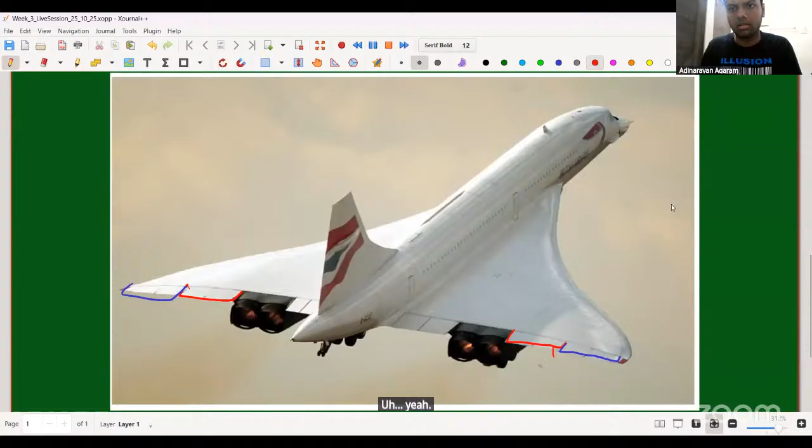Can you mark the control surfaces in the back? So, outboard of the engines. Yeah, just the outboard ones. And you can maybe just highlight, draw in red. Yes, sir. Okay, draw the other ones in blue or some other color, because actually this helps. Sure. Thank you, and sorry I'm paining you on this. No. Yeah, this is fine. Okay, so now you have a red-blue pair on either side. Those are your control surfaces.

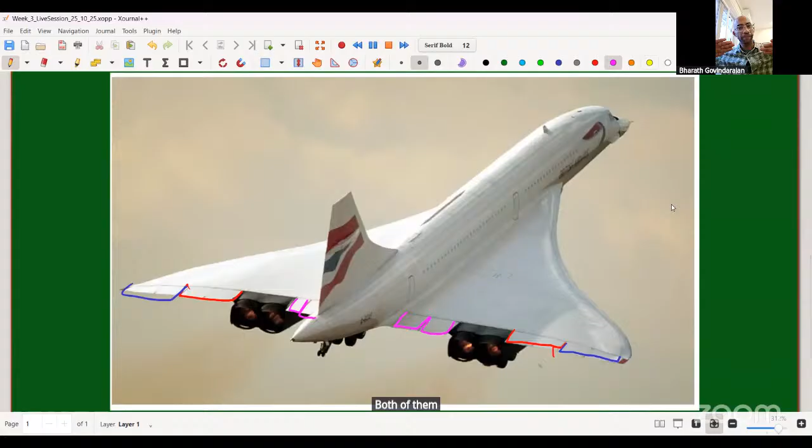Now there are a few things we can do here. Let's say we tilt both of them down. Then effectively you're going to create a force up. And again, it's the same idea as before, where you have a long distance to the aircraft center and the vehicle will effectively pitch down, right? So if you tilt both red-blue pairs on the left and right down, then you can effectively make it pitch. So this acts like an elevator. If you move the control surfaces in the same direction, you can effectively get a pitch of the aircraft. So that is why we call it an elevator.

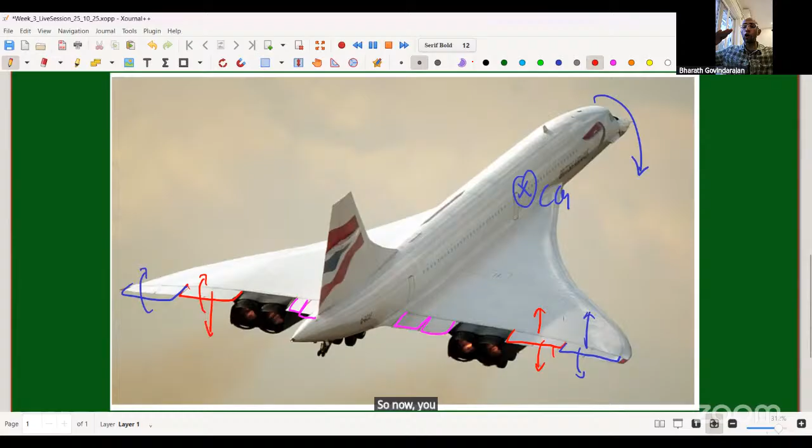But you can do something a little bit more fun. You can have one red-blue pair moving up and the other moving down. So the ones on the left side of the airplane could be moving up and the ones on the right side moving down. So now you have an opposite deflection, which means forces acting in opposite directions, as he's shown over there, which will cause the airplane to roll. So the same control surfaces, if deflected together, will cause pitch. If deflected differentially, will cause a roll. So that's why we don't call it an elevator or an aileron. We smash the two words together and call it an elevon.

Okay, so that is a long answer, Chandrasekhar, to your question. I don't know if any of that made sense, so please let me know how that was. Yes, sir. Understood, sir. Thank you, sir.

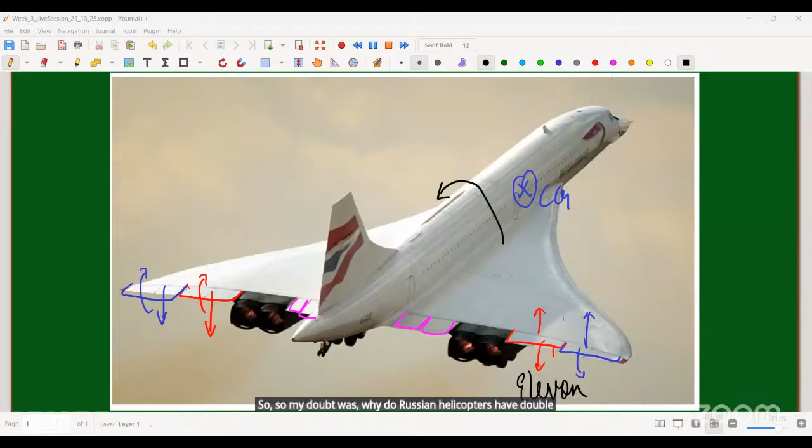So my doubt was, why do Russian helicopters have double spinner wings on their top, while the rest of the helicopters have only one wing, the main wing? Yeah. So, okay. So first, it's called a rotor. We don't use the word wing when it comes to a helicopter. So what you're referring to is one rotor above the other. That's called a coaxial rotor setup.

And I believe that company you're referring to is the Kamov. Kamov is the only company, at least successful commercial organization, that makes these counter-rotating coaxial rotors. In most cases, you have what we call a main rotor and another one in the back called the tail rotor. Coaxial rotors have some advantages, and one of the primary advantages why people stack one rotor on top of the other is to reduce the footprint.

Because a conventional helicopter has one rotor on top and the second rotor, which is really far behind. So the length of the helicopter is quite large. Whereas when you stack one below another, you eliminate the need for the other tail rotor. So your helicopter can actually become quite compact. That's one of the big reasons why people use this coaxial configuration.

Okay, sir. Sure. Thank you, sir. Hey, no worries. Nikhil, ready? Am I audible, sir? Yes, you are.

Sir, what is the use of spoilers on an aeroplane, sir? What is the use of spoilers? What is the use of a brake in a car? The exact same thing, right? Okay, there are two answers to this. So what is the use for a brake in a car? You may say that it is to slow down, but someone else might look around and say brake is really what makes you go fast, right? So unless you can stop it, you're not going to go fast. So the brake has another effect of allowing you to go fast.

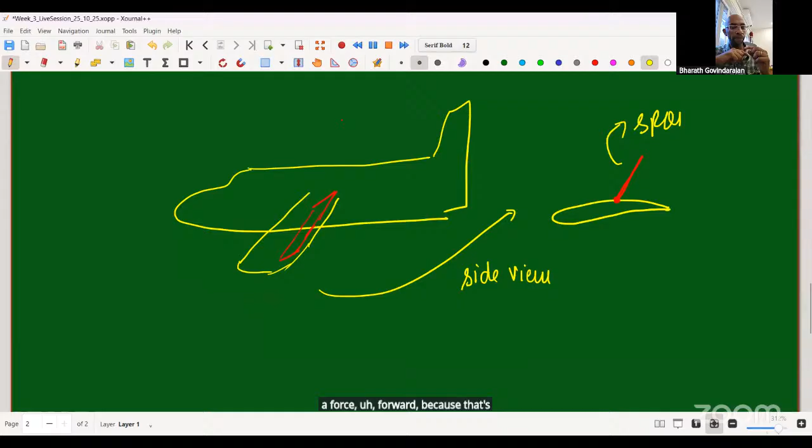The third option, I said there are three options. So there's a disc brake, there's a spoiler. The third one is that engines will have a small slot that opens out of it. So while an engine during its normal operation is supposed to produce a force forward, because that's the thrust component, there is a small portion of the engine which opens and it has the internal mechanisms which allow the thrust to be acting in the opposite direction.

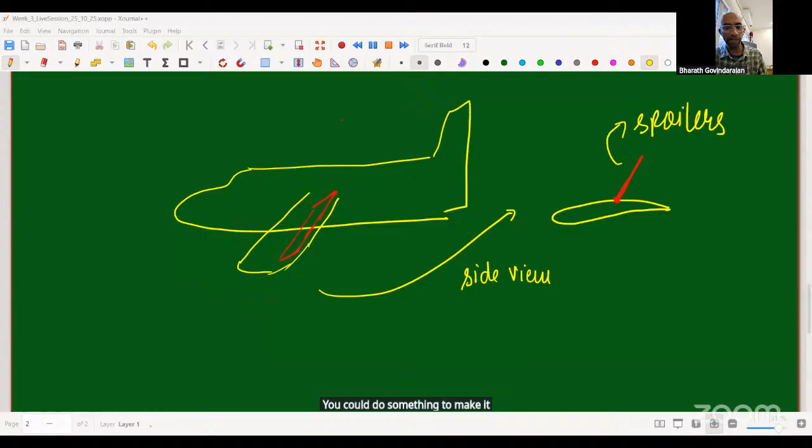So while in normal operation an engine is supposed to produce a force in the forward direction, you could do something to make it create a force in the backward direction, which would again act to slow down the vehicle. So brakes, spoilers, what we call cowl flaps on engines are all to slow down the vehicle. Does that help? Yes, sir.

Okay, thanks, sir. No problem. Hetty? Hetty, are you there? Maybe an audio issue. We'll figure it out. Gia, do you have a question? Am I audible, sir? Yes, you are.

Please go ahead. I had a doubt regarding ailerons. Are they similar to the function of flaps or not? Okay. Functionally, they are different, right? Ailerons, flaps, rudders, elevators, they're all the same idea of having an airfoil with the trailing part movable. In that sense, they're all the same. What really separates them is where you place it on an aircraft and how you use it.

Flaps are typically deployed together and they are towards the inner sections of the wing, and their primary role is to generate more lift so that you can fly the aircraft at a slower speed. So we briefly looked at this. You have an airplane that weighs, let's say, 100 kilograms. It's a really light airplane, doesn't matter. Let's say you're traveling at 20 meters per second, and you have built your vehicle such that at 20 meters per second the wing generates 100 kilograms of force, so the airplane is balanced.

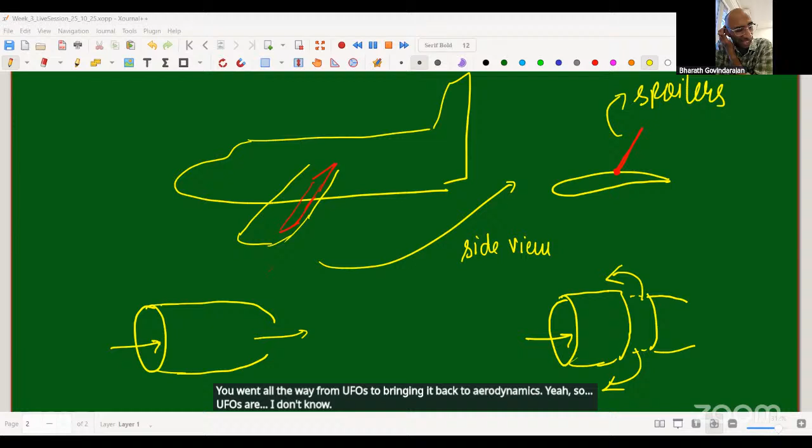Yeah, so UFOs are, I don't know, unidentified flying objects, or if I'm cooking something, identified fried objects. But either way, we don't know exactly what they are, which is why the U stands there. Now, your question is fair, though. I mean, I can't comment on what exactly they are because we don't really know it. But it's a nice question in that, are these shapes that we see, can they be aerodynamic, right?

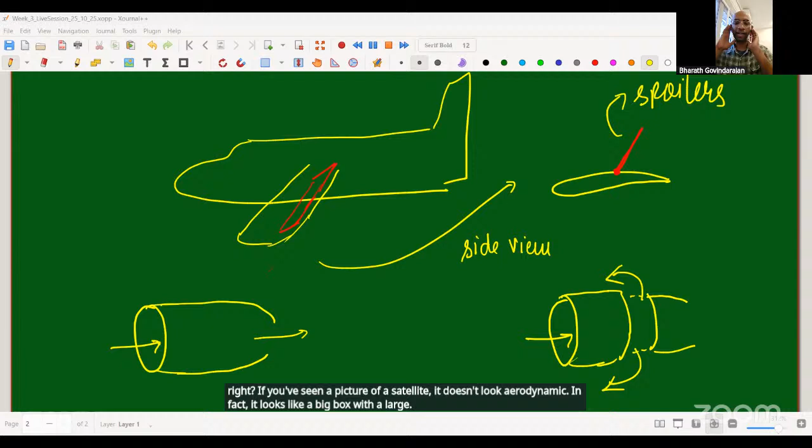And I think that's a good question because we typically think of moving in space based on something has to be aerodynamic and it should cut through the air quite clean. But you can also find instances of objects that are just bulky and appear non-flyable that can actually fly. So let's take a satellite, for example, right? If you've seen a picture of a satellite, it doesn't look aerodynamic. It in fact looks like a big box with a large solar panel attached to it. It's not exactly something that we would conceive to fly.

But you can still control it, because what happens on a satellite is you have small rockets that you place all over that can fire in small bursts that can effectively create a force, and it'll let you do the same three things. You can translate in three axes, you can rotate along the three axes, and therefore you can fly. Argument to that is, yeah, we're in outer space, there's no real air here, so how does it really matter? You can think of the same idea and you can bring it back to Earth.

And there's an aircraft called the F-35, right? F-35 Lightning. It's, I don't know, 5-10 years old, which is still latest generation. One of the things it can do is something called vector thrust. It's an airplane wherein the engines can point down and you can push upwards. So this is an airplane whose conceivable idea for us is it should move quickly in this direction, but it can actually move vertically. It's not at all streamlined in that direction. You just have obnoxiously powered engines pointing down, which can push you up.

So the idea is, yes, you could come up with ideas which will create sufficient forces in different directions. Perhaps what we did not very clearly talk about when we're thinking about airfoils and streamlining is, we want to achieve that in the most efficient way possible. I want to try to do this with the least amount of energy. Right. So even a clunky shape like an airplane to move up and down can be done with very overpowered engines, which is what the F-35 Lightning does. It also has a slight fan in the middle, but it doesn't matter. A classic example of vector thrust would be the Sea Harrier, which is a plane that was designed a couple of decades ago. Now, coming back to your question on UFOs, right?

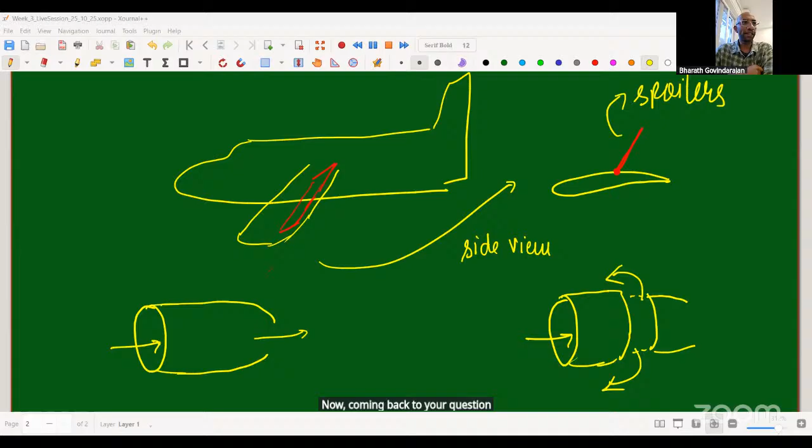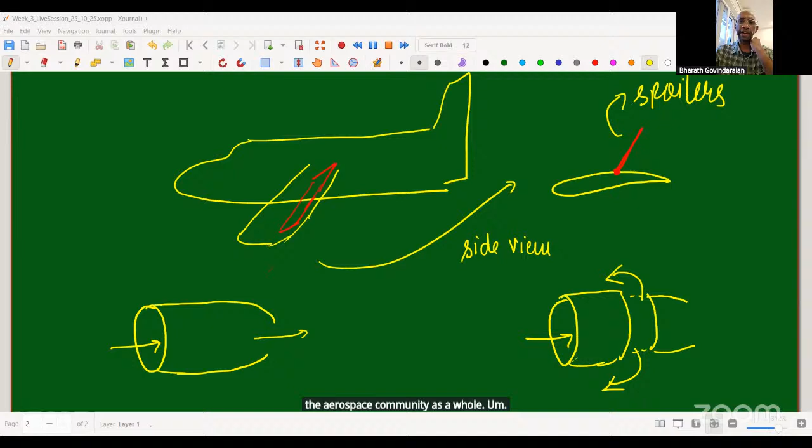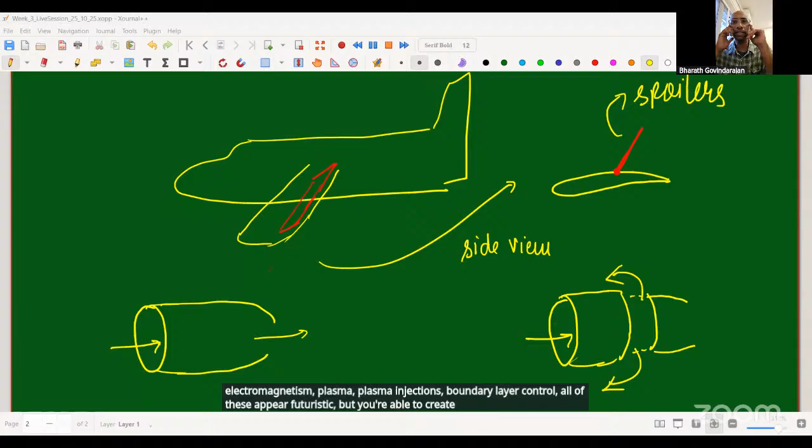There are a lot of technologies that we are researching. We being the aerospace community as a whole, there are a lot of really nice ideas with electromagnetism, plasma injections, boundary layer control. All of these appear futuristic, but at least on a lab scale or a numerical scale, you're able to show that you can get some of these out of the world or out of the way ideas to generate forces in different directions. So whether we are there as humans to be able to do it, perhaps not. It's a little far away, but it is conceivable that these technologies may mature into what we are unable to understand right now.

A word of caution on UFOs also, we only see photographs and we see small snippets of videos. There's a world of difference between something flying level for a long time and something flying in a ballistic trajectory. Right, I can take a big boulder and throw it, and I could take a snapshot of it for a few seconds, and it looks like you have a stone that's flying through the air, right? But that's a very small snippet. Perhaps if you had the full context, you'd be like, yeah, that's really not flying. That's just a rock being hurled into space, right?

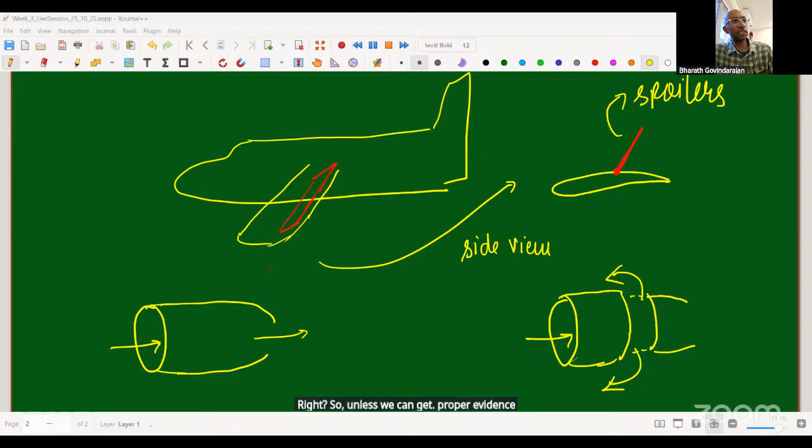So unless we can get proper evidence of these things, verifiable evidence, right? Not someone said it, someone posted it, something that you can actually verify for yourself. It's hard to comment on what exactly these UFOs are. I don't know if I did answer your question.

Hopefully. No, sir, that was really helpful. Thank you. It was a fun question. Yeah. So thank you so much for asking. Thank you, sir. Yeah. Let's see, I'm going in sequence of hands I saw raised. So I think, sorry, who is this? I'm sorry, I can't see.

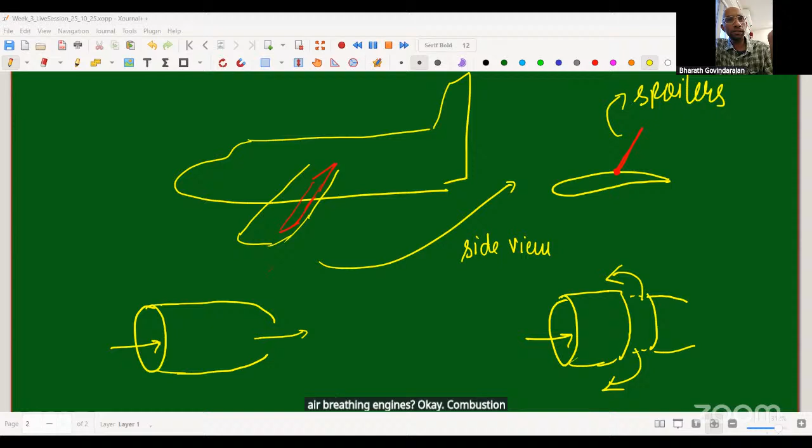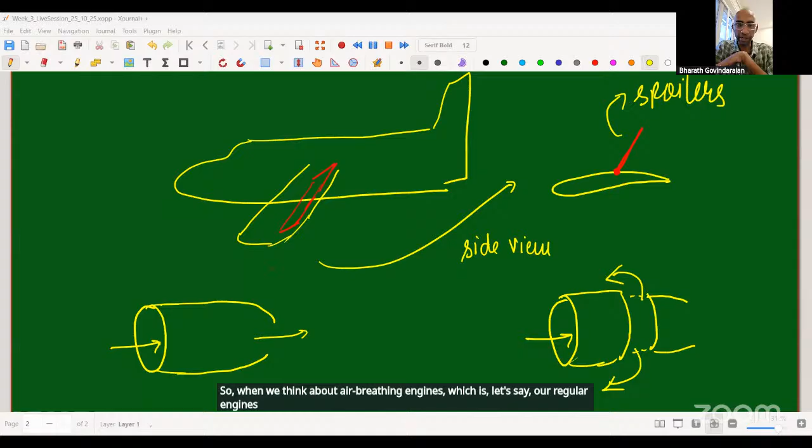What you're referring to is something called air breathing engines versus non-air breathing engines. For combustion to happen, you need three things: oxygen, fuel, and temperature. You need the trifecta of these three things; any two will not suffice. So air breathing engines, our regular engines on regular airplanes, take in the oxygen from the atmosphere, suck it in, and that's why it's called air breathing.

As you rightly pointed out, when you go into space, there is no air, at least not in the conventional way we think about it. So you can't rely on something being sucked in from outside the engine; you have to carry it yourself. You carry the oxygen, you carry the fuel, and you find a way to ignite it. That's what rockets do. You have solid rockets, liquid rockets. We talk about different aspects of these engines next class, so can I request you to hold off on that?

The second part of your question is still valid; I can answer that now. You asked if aerodynamics make any sense. Well, in space, no. You can have fins, wings, aerodynamic objects which are useless because there is no airflow around them to create forces. But these objects still have to take off from Earth and go through our atmosphere where there is air. So those aerodynamic devices are still useful within our atmosphere to get to outer space, after which they become redundant. Is that okay?

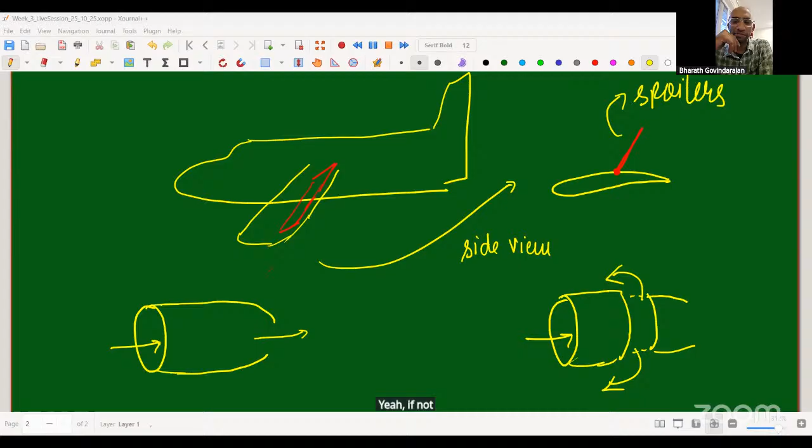Yeah, okay. Thank you, sir. I'll hold on and probably find my answer next week. If not, just fire the same question next week and we'll discuss. Okay, sir. Thank you. Sounds good. Pranay, do you have a question?

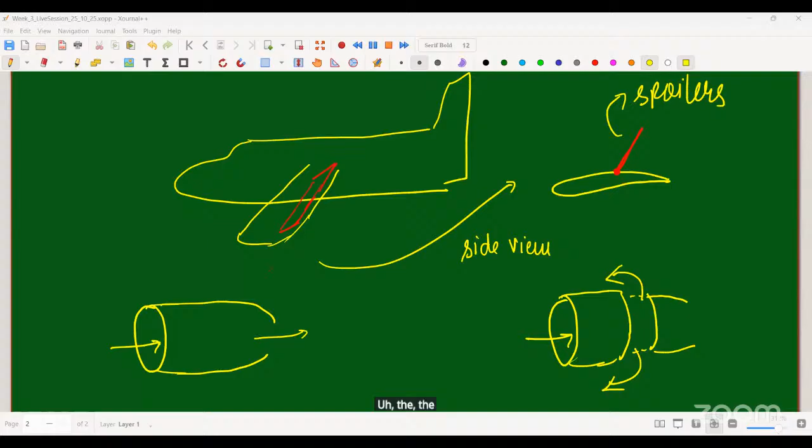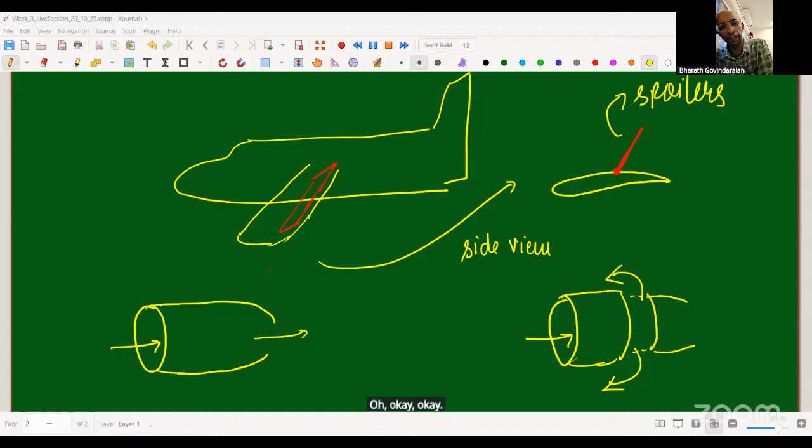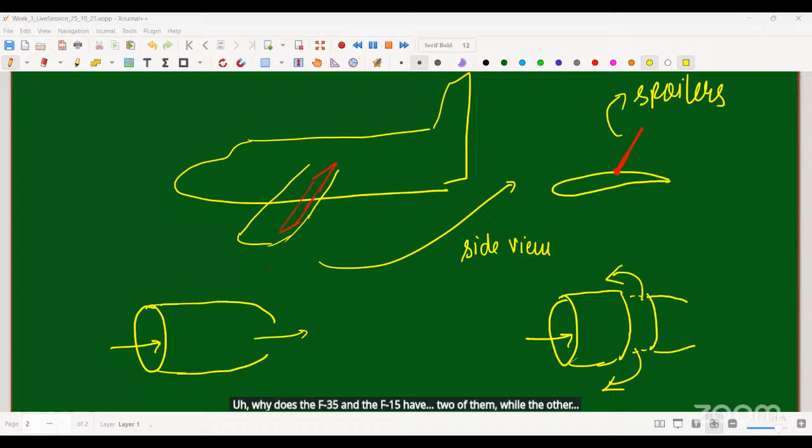Yes, sir. My question was, why do aircraft like the F-15 and the F-35 have two fins at the back, while in conventional airplanes you see only one? I'm trying to remember what fin you're referring to. The dorsal fin, the one at the back. You mean the horizontal tail? No, the upwards one, the vertical one. Okay, got it. So those are the vertical tails. You're asking why the F-35 and F-15 have two of them, while a general aircraft has only one? Correct. This is a great question.

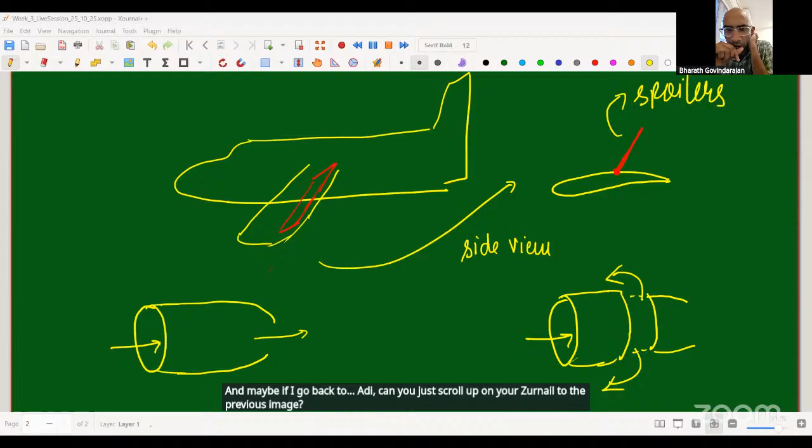This is actually a question on design. Adi, can you scroll up on your Xournal to the previous image? Okay, that works. So here you have a single vertical tail, whereas in some fighter aircraft you have two.

The whole point of the vertical tail is to provide what we call yaw stability and yaw control, such that if an aircraft is going straight and a small disturbance comes sideways, you don't want the aircraft to move in an arbitrary direction. You want it to still be pointing forward.

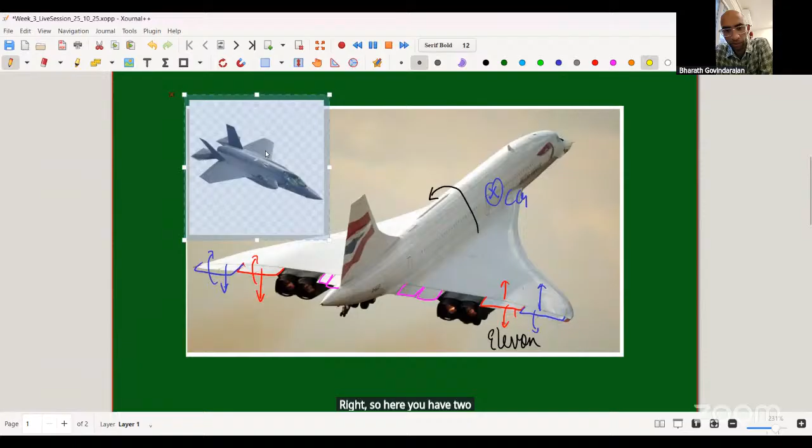Okay, there you go. Right. So here you have two fins and here you have one. So the first function of the vertical tail is to give you yaw stability. Secondly, you want to be able to control the yaw, so there is yaw authority in that sense.

And because these are effectively airfoil surfaces, what is going to dictate the amount of force that you get is effectively going to be the area. So during design calculations, you would have decided I need so much area to be effective. What happens, especially with fighter aircraft, is if you have one single surface, it tends to be really, really tall. And that can affect a lot of the other aspects of the aircraft.

Anything from how it handles, to the structural weight being too high, to a very simple fact: some of these aircraft are supposed to be stored on ships. You have a height constraint. So you may not be able to put a member that is really, really tall. So you say, well, I can't have one tail, I will break it into two tails. That could be one reason.

The other thing you have to appreciate is a fighter aircraft. You always have a trade-off between stability and maneuverability, right? If something is very, very stable, it's not going to be maneuverable, which means it's not going to be responsive to many inputs, which is a characteristic you like for a passenger aircraft.

You want it to be stable, you want people to have a comfortable journey in there. You don't want people sitting in the aircraft and getting thrown around, etc. It's just not a pleasant feeling. Nobody's going to come and buy your aircraft or sit in your aircraft again, and that's just a hopeless business model. On the flip side, when you're a fighter aircraft, you don't really care about it being very stable.

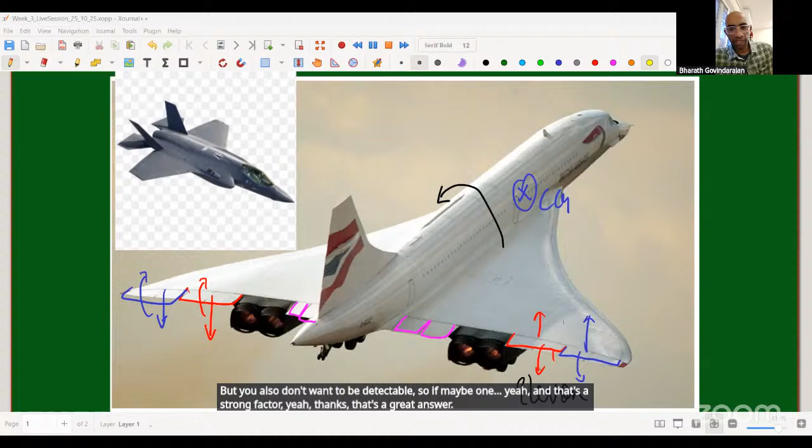Pranay, I hope that was okay. That's perfect, sir. Thank you so much. Okay, we'll tag team. I know a lot of you have raised hands. I'm giving chances to those who have not yet asked a question, so please don't be too upset with me if I don't pull you up immediately. Dhruv.

What? Sorry. Hello, Dhruv, can you hear me? Hmm. Yeah, I'm not fully able to understand what disc we're talking about. I guess when your audio is back, can you just clarify that? Yeah, hello. So go ahead. What were you saying?

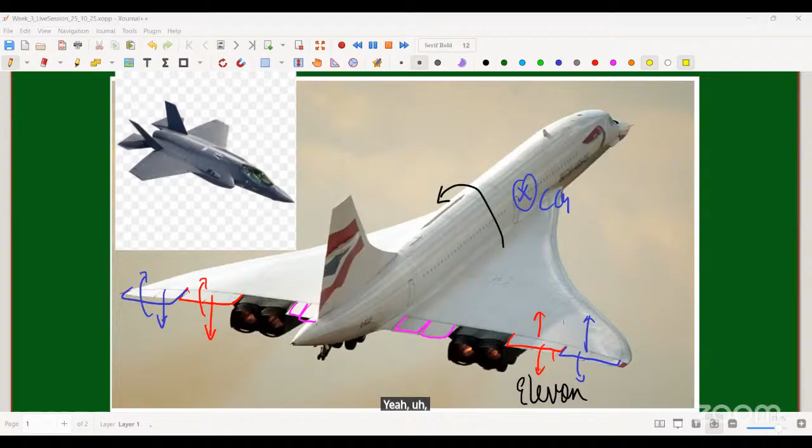Could you repeat that? I'm just saying I couldn't picture an aircraft like this. So do you have an example or something that maybe we can just search on the internet and throw a picture up? Let me just check. Just give me a second. Sure.

Also, another question. Apart from that, I've seen certain Mach 5 aircraft. Instead of having a sharp-tipped wing, they have a blunt wing. What is the reason for that? You've seen a hypersonic vehicle with a blunt tip? Like more towards Mach 5. It's a bit unusual for me to see that, and I don't know why.

Yeah. So, okay. Did we discuss Mach number or is it? Yes, sir, I think so. Maybe it's next week. But it's fine, like I said, I'm not bumping you off. I'll give you a short answer, then we can take the longer answer.

Mach number is effectively a ratio of your speed to the local speed of sound. So if you're flying at Mach 1, you're flying as fast as the speed of sound. If you're flying greater than Mach 1, we call it supersonic flight. There is a subcategory of supersonic flight where, loosely, it is 5 and above, which we call hypersonic flight.

And actually, there aren't too many airplanes out there at hypersonic speeds. In fact, DRDO did a test a couple of months ago, which showed a 1,000-second flight of a hypersonic test bed. So I'm not entirely sure what wings you're talking about. Maybe this you can clarify next week when we discuss.

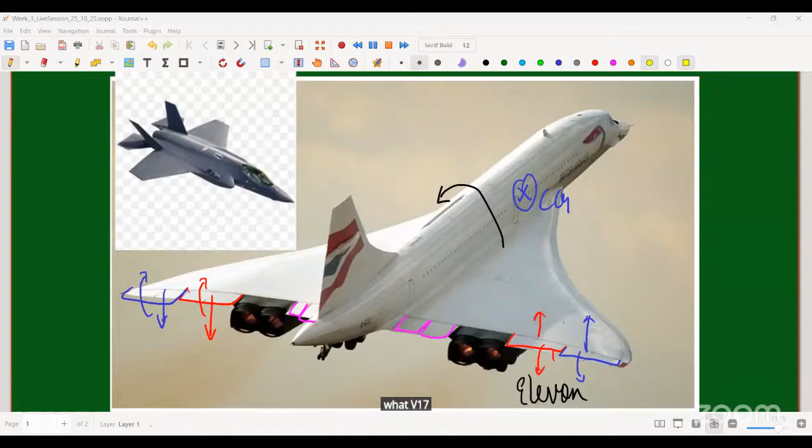Okay, sir. Also, one of the examples of the disc-shaped aircraft is, I think, the Vought V-173. Can you spell the first one? It's sort of like a flying pancake, you could say. Vought V-173, V-O-U-G-H-T. Dhruv, Adi, could you just see if that's something there and throw a picture of that on your page?

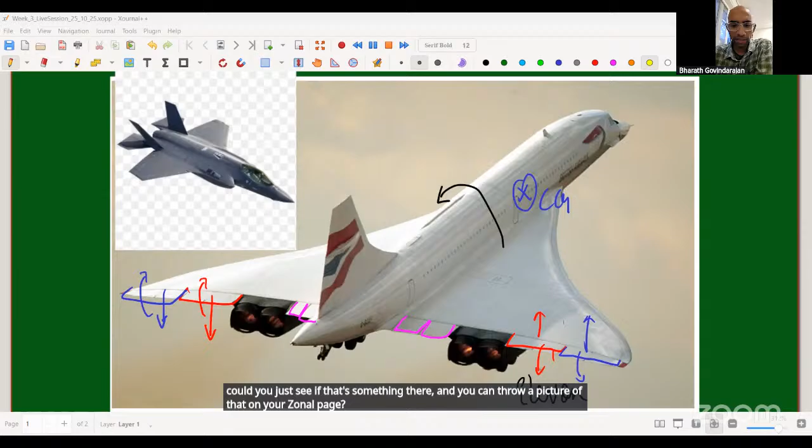So the idea here is to try and get rid of the fuselage, which is not an aerodynamic body, and try to make the entire vehicle a flying wing.

Yeah, in general, the same principles that work for overall wing would work here as well, except the entire airplane itself is just thought of as a wing. Oh, okay. It's an interesting design. That's really it. Okay, sir. How useful is it? Thank you, sir. Yeah, yeah. Cool. Let's see who else.

The B-2 Spirit is a better example, I think, in terms of flying wings we talk about. Which one? The Northrop aircraft, sir, the flying wing, B-2 bomber. Yeah. Yep, sure. That's fine. You can throw that up there also. Sure. I think Ritikesh.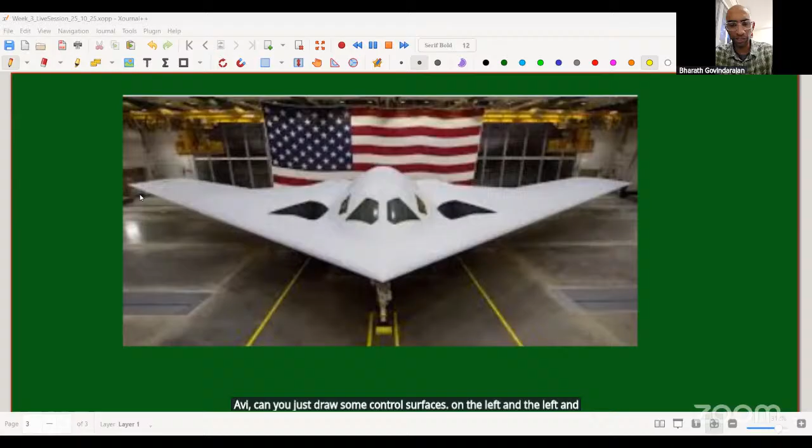All right. So your question is there is no vertical tail, so how do you stabilize it? And the short answer is you don't. Even the B-2 bomber, Adi, can you just draw some control surfaces on the left and right towards the ends of the wings? Just scratch some red box or something. Yeah, something like that is fine.

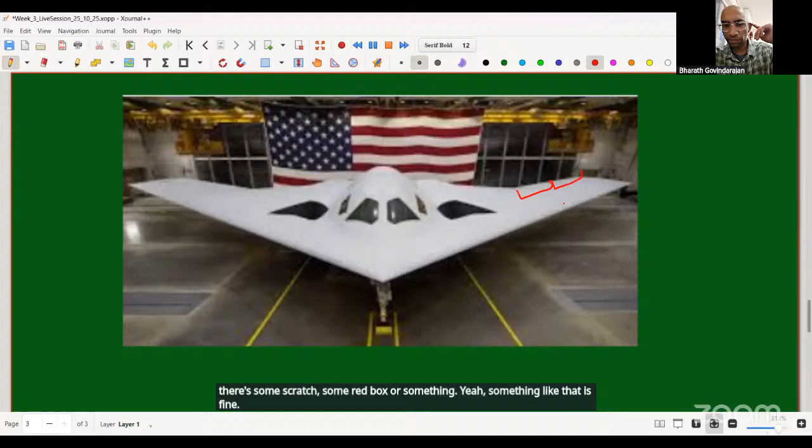Okay, so in this case, you will not have absolute yaw stability like you would with the presence of a vertical tail, but you can still try and get yaw stability by carefully deflecting these or by changing the thrust of the engines. So another option to get yaw stability is, if you have two engines, you can fire one and not the other, and that will create a force mismatch, which will create a couple.

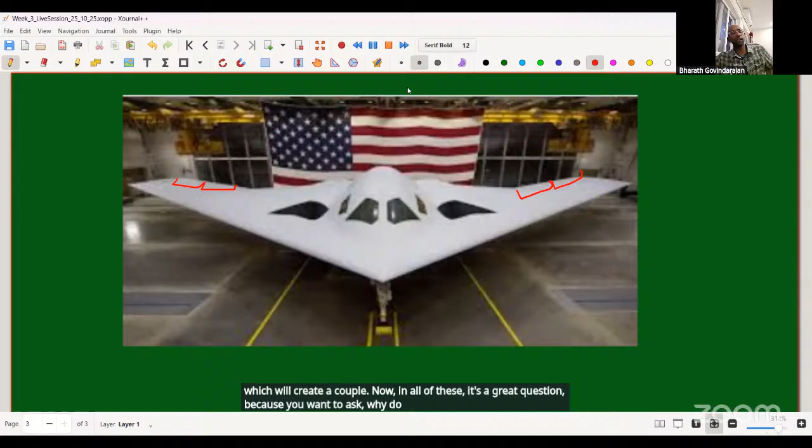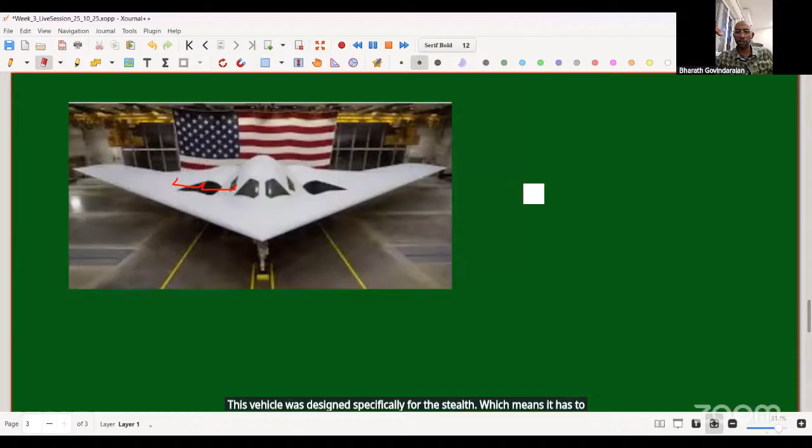Now, it's a great question because you would ask, why do you not have a vertical tail here? And the reason you don't want a vertical tail is because this vehicle was designed specifically for stealth, which means it has to have a minimal radar cross section. And having a vertical tail would increase its radar cross section. Yeah, there you go. Great picture here.

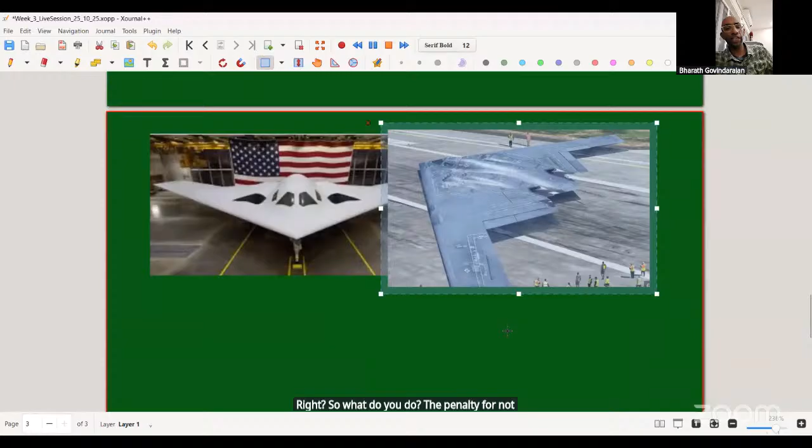So the penalty for not having it is you are going to suffer a loss of yaw stability or yaw authority. So you have to compensate for it through other mechanisms. You may do that by carefully contouring the airflow on top of each side of the wing, or you may have a couple between.

You see the control surfaces are placed at an angle that actually can give you a little bit of yaw authority also. But the problem is the minute you do a yaw, you get some yaw moment, you will also get a pitch or roll. So in a conventional aircraft, you can get roll separate from yaw, separate from pitch. But in these kind of aircraft, they get coupled.

It's like if you touch something somewhere, something else is going to happen. But that's just the penalty you pay. You just need a better control system to handle it. But the advantage is you have minimized your radar cross section. All aircraft are designed for a certain purpose, and you will never get something for free. You just have to deal with whatever the rest of it is. So in this case, I would say the answer is with a very strong control system.

Is that okay, Sarvesh? Yes, sir. Thank you. Okay. You don't sound entirely happy, but okay. Spandana? Hmm. Spandana, are you there? Okay, maybe some audio issue, will come back again. Tarun? Good evening, sir. Hey, good evening. Sir, my doubt is... Spandana, I'll come back to you after Tarun if that's okay.

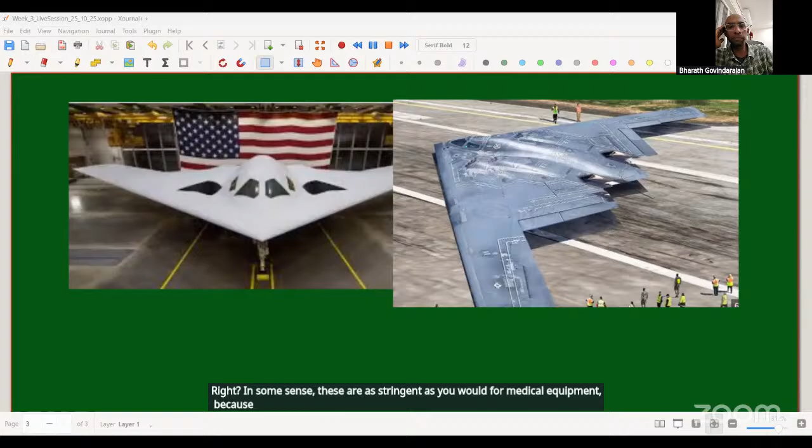And so you would do a lot of tests to make sure the subcomponents work. You would do a lot of simulations. There's a rigorous safety board which every airplane has to go through, and they have a huge set of requirements, right? In some sense, these are as stringent as you would for medical equipment, because you can't afford mistakes. These things have to work on the first try all the time.

You're not going to say, oh, well, let's see if it works this time or not. No, you wouldn't do that. You would not put something out there in the field in the medical industry unless you were sure that it's going to work. That similar sort of rigor is applied to the aerospace industry.

And then, of course, now with technology getting better and better, we can afford to crash airplanes because you also have unmanned aerial vehicles, right? As long as you don't put a human in it and you are in a safe test space, sure, test it out. It's okay. Miniaturize it, put it in a wind tunnel, have smaller models, fly it, try it. But ultimately, you have to do it with people on board.

And that's where you have test pilots coming, right? There is a whole segment of aviators who are test pilots whose only job is to push aircraft to its limits and to really test the aircraft. And these people are actually mavericks in their own sense, right? They're actually far higher certified than your regular aviators, because their job is to test something to failure, right? And they're expected to get into uncertified machinery or partially certified machinery so that you can fly.

So I'll keep rambling on, but in the interest of everyone's time, there is a long set of requirements, and you have a combination of experiments, model testing, simulations, subcomponent tests, and full scale tests before you are actually convinced that this aircraft can fly.